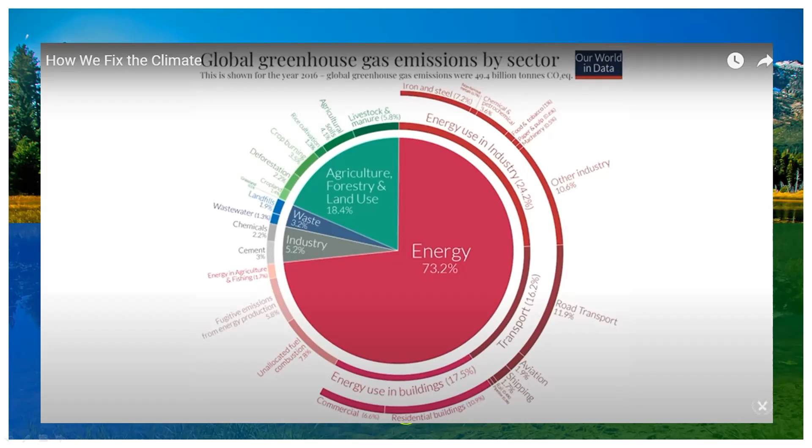Okay, so an example of a sustainable slash natural building material is the proverbial bamboo. So it is found on so many parts of the planet, and it is also found here in our country. However, if I'm not mistaken, the species here are not strong enough to make larger structures compared to other countries like Vietnam, like what the example I will be showing you later will show.

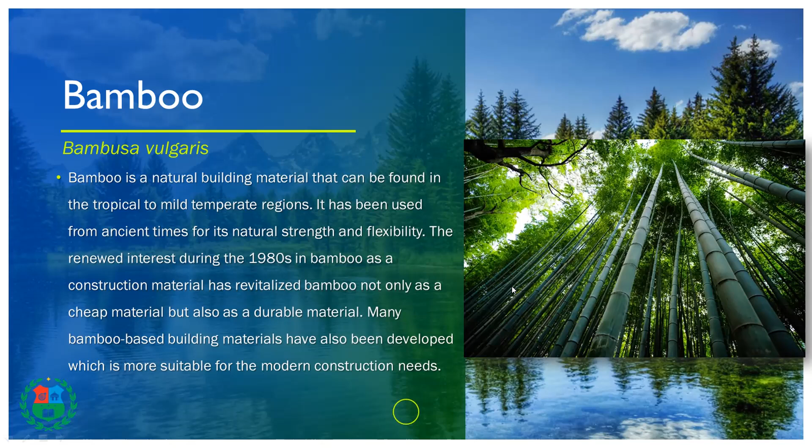So good health and well-being, because I think I would feel very relaxed and healthy if I came into such a structure, because it's very maliwalas. So it is also trying to reach industry, innovation and infrastructure, and sustainable cities and communities, responsible consumption and production, with regards to the consumption and production of natural materials, in this case bamboo and thatch, and of course climate action.

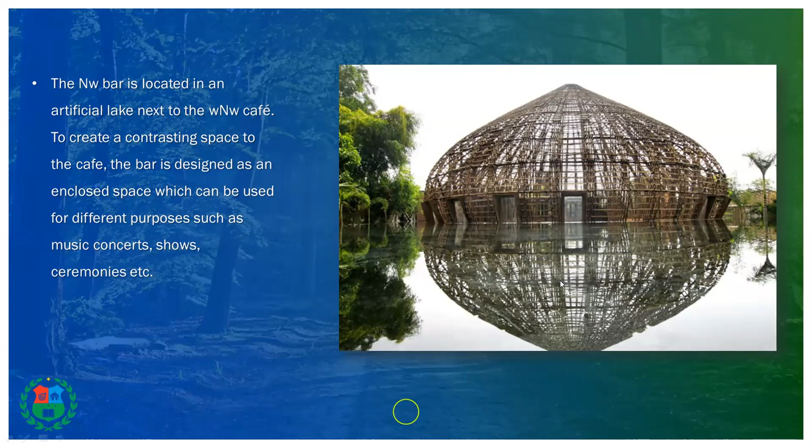So this is the interior of the Wind and Water Bar, a structure located next to an artificial lake. So I said that earlier. And what's great about this structure is it has an oculus at the center, which is reminiscent of structures halfway across the world, like the Byzantine structures, the structures in Renaissance Italy. So they also have these oculi on their buildings. So here in Vietnam, and with this material, it's also repeated, which is a very interesting mix of ideas. And it's not only for aesthetic purposes. This is placed here so that hot air will come up, so that it wouldn't get very hot and humid inside.

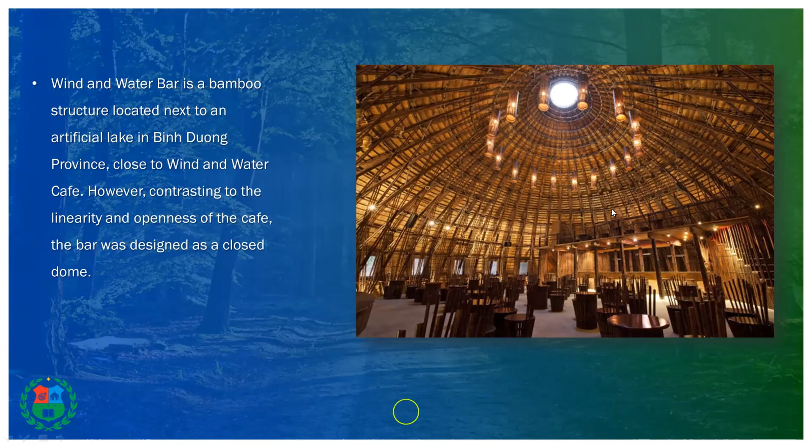Okay, so as shown in this framing, they did not use nails. They tied them with ropes, which I believe are sturdy enough, because the structure is still intact. And then they also placed dowels. So later there will be some details. They also have these stepping stones on the artificial lake before you enter the bar.

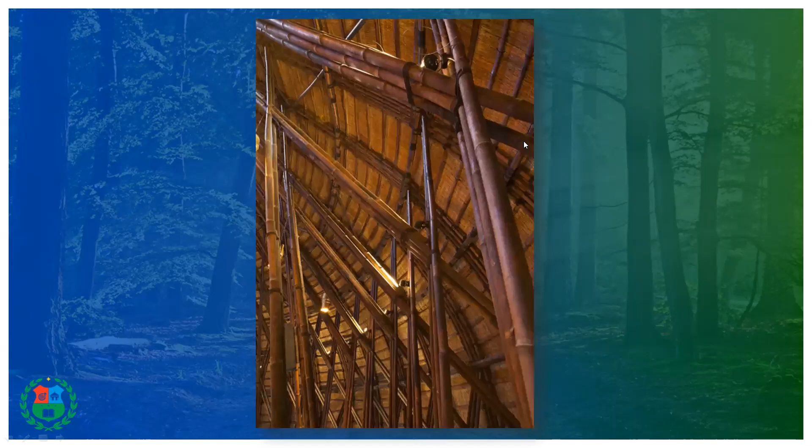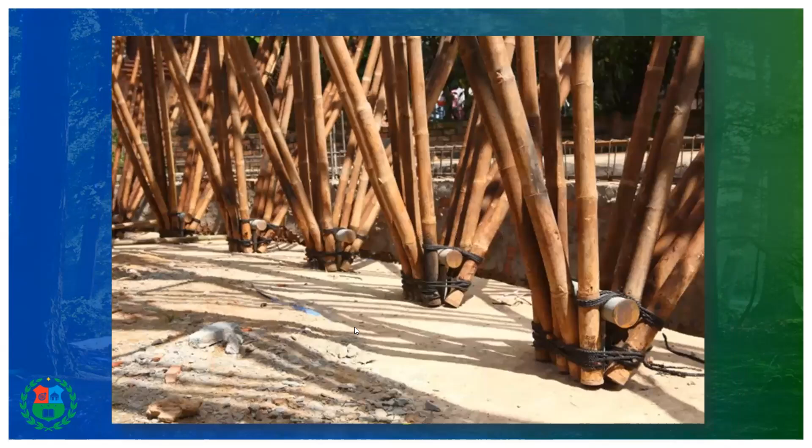Okay, so this is a close-up picture of how they connected the bamboo frames onto the foundations. So this material that I'm pointing with my cursor right now is steel. So they bundled all these bamboo frames, and then they tied it all around with ropes, which is sturdy enough, I would suppose.

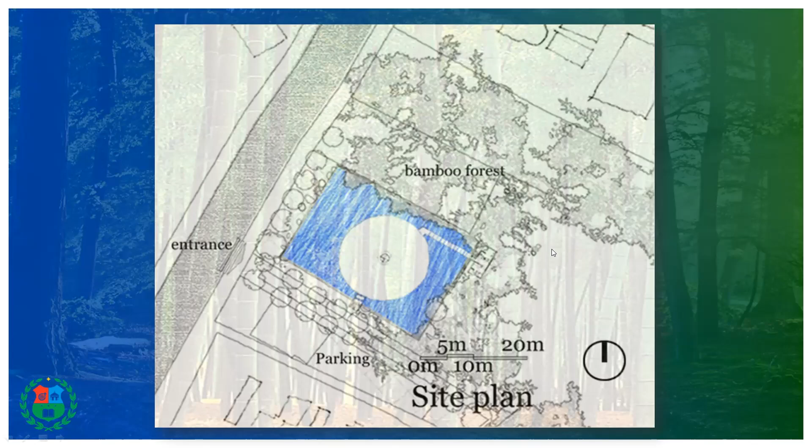Okay, so this is the site plan which I got from ArchDaily, and I apologize if it's just hand drawn. Okay, so this is the artificial lake, and then this is the main road. And then you just walk to the water bar over here, and it even has a bamboo forest on its periphery. And then this is the plan. So it's 15 meters in diameter at the interior, and also they place the comfort rooms away from the main bar over here.

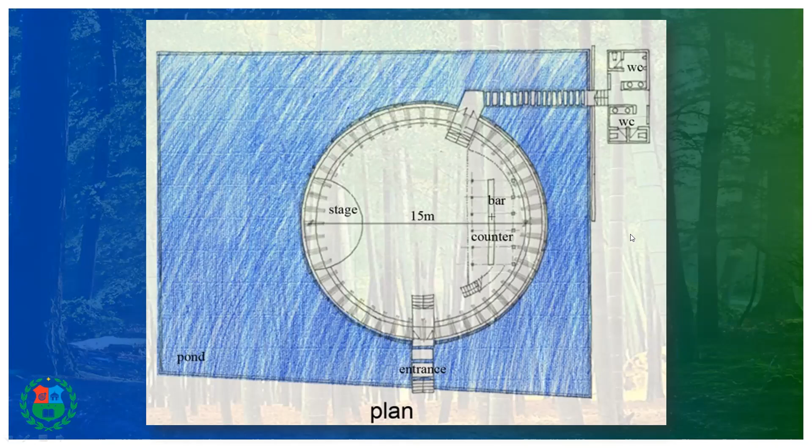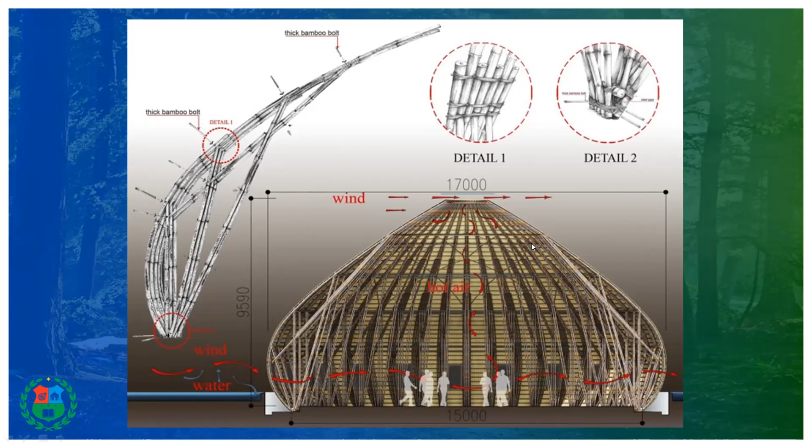So another project that VTN Architects made is the Sen Village Community Center, which is also another bamboo structure. So it also fits these sustainable development goals, number 3, 9, 11, 12, and 13.

So the site area is around 48 hectares, but the gross floor area is around 1,395 square meters, and it was completed in 2015. It has a 250 people capacity and is located around 20 kilometers away from the center of Ho Chi Minh City, and serves as a part of a new residential master plan of 2,200 houses.

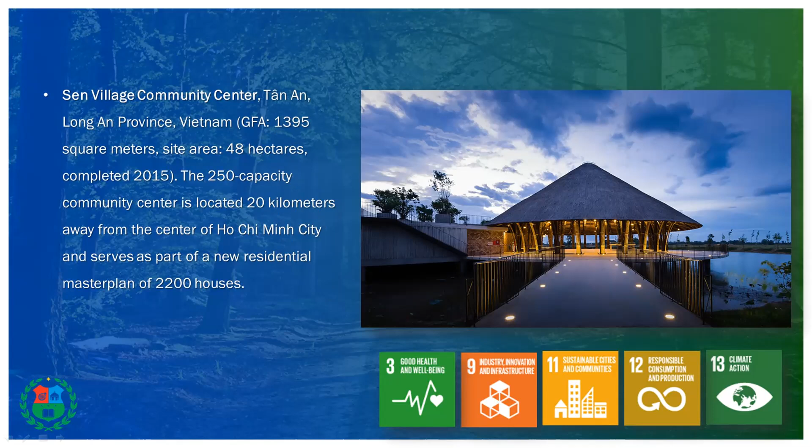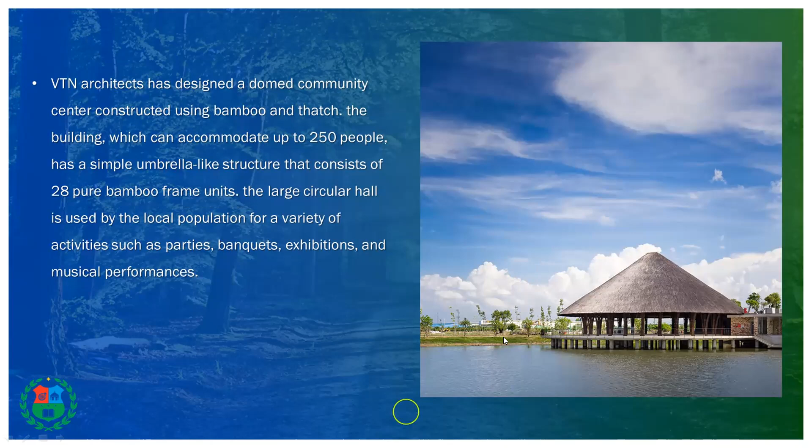So it's very similar to the earlier example because they were designed and made by the same architect. So it's also used for performances. So if we're going to be specific about the species of bamboo, because there are like thousands of species, in an interview by Blueprint Magazine,

VTN said that there are two native bamboo species in Vietnam. So one uses bamboo that can bend to form curves and one that is straight. So this is the one that's straight and this is the one that curves. The bamboo that is bendable is locally called tam vong, or in Latin, this is the word. And then the straight one is called luong, and it has a corresponding species name scientifically.

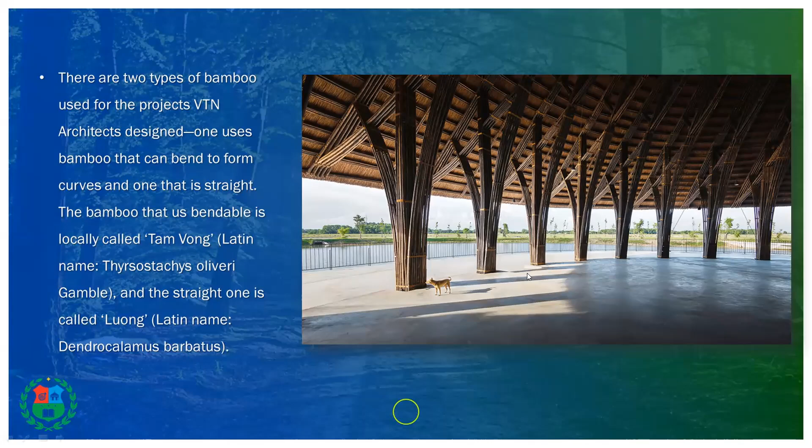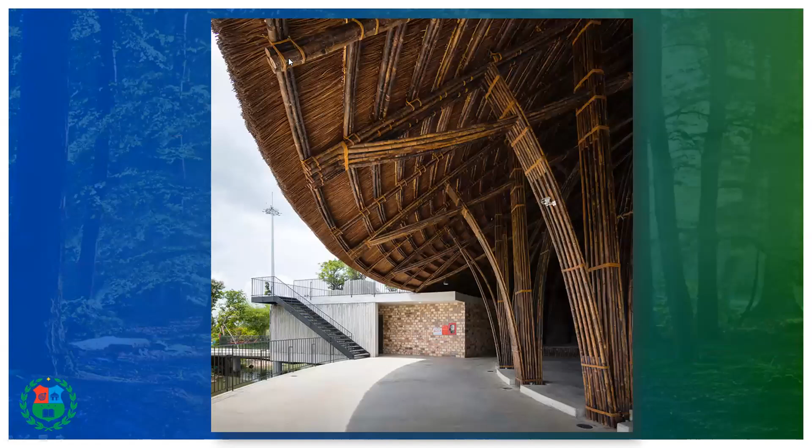So it also has an oculus, so it acts and behaves just like the prior example. So it's nice. And the connections were also tied up by ropes, and I'm supposing they also use those thick bamboo dowels for the connections over here to make it more sturdy. So this is another view of it, I think this is at dusk. And this is another exterior view of it at night.

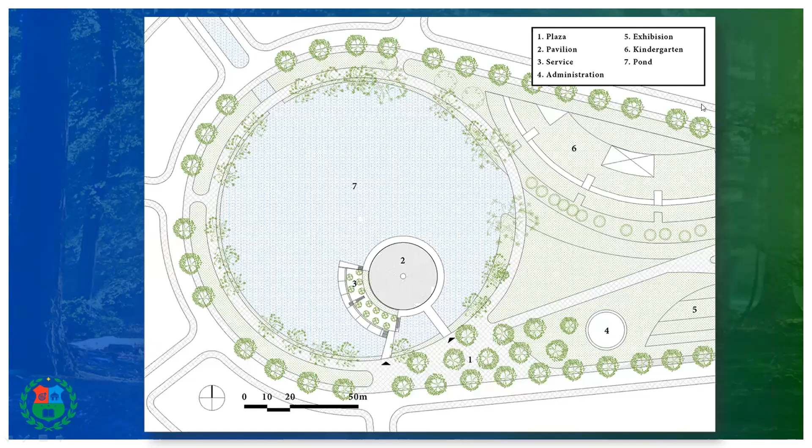So what I know with these foundations that are supposed to be embedded in water, I just know this from reading, is that these foundations should be pierced very deep within the earth, where the bedrock lies, so that the foundation is going to be stronger. So it shouldn't be just around here. But I'm betting that these foundations are somewhat deeper to make the structure sturdier.

So it's not made entirely of bamboo because the slab over here is made up of concrete. So it's not 100% considered as sustainable and natural. But I think that's good enough and negligible because it's almost impossible to achieve 100% sustainability and naturalness of the material.

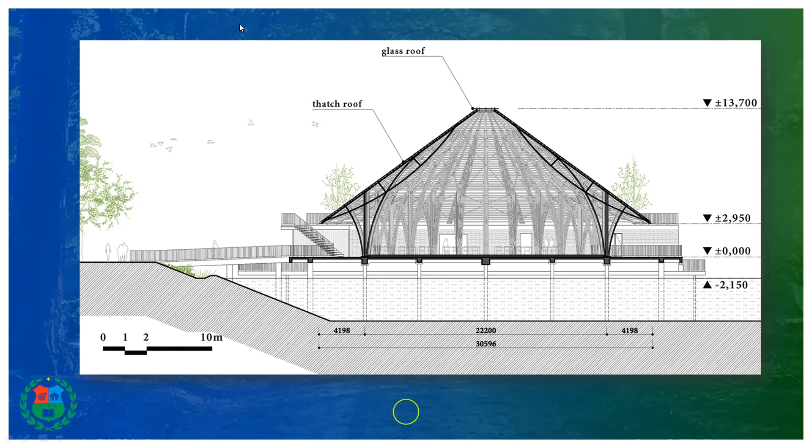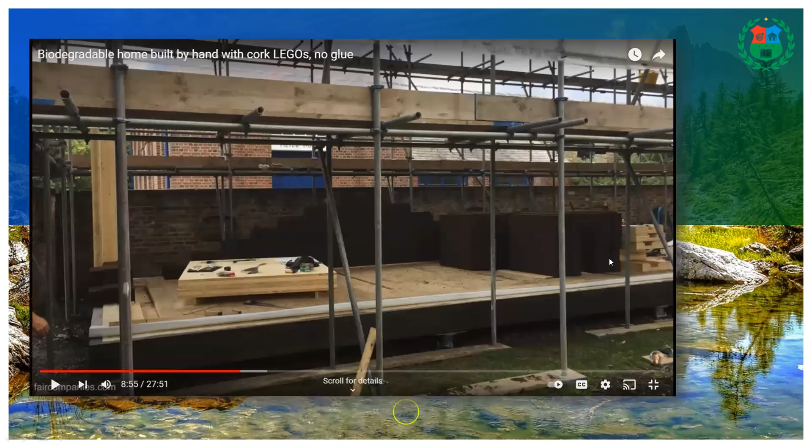Okay, so this is a screen capture from YouTube, from the video Biodegradable Home Built by Hand with Cork. It's just like Legos. They didn't use any glue, so that it would be a lot easier to dismantle them once the building has used up its useful life. These are pictures while the architects were constructing the cork house. They also used the scaffoldings that we also use here in the Philippines.

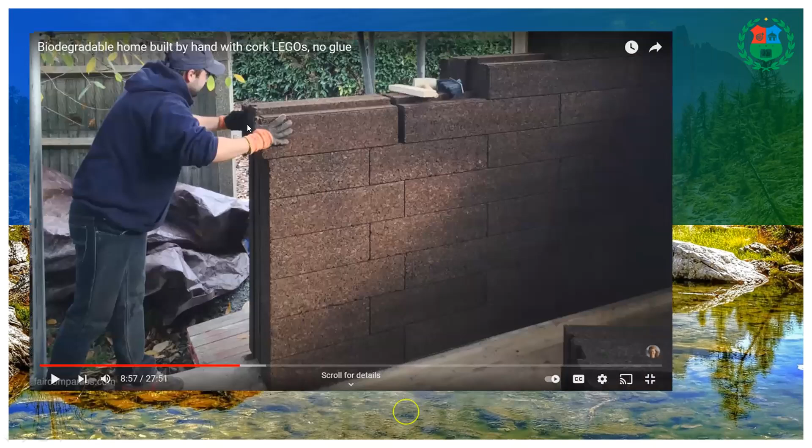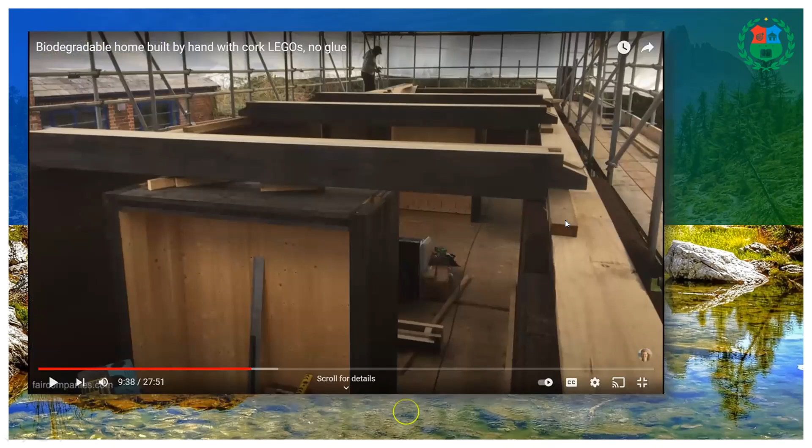If I'm going to extrapolate the dimensions from this picture, I know that this is 50 centimeters, so that's around half a meter, and I would suppose that this is around 50 centimeters because it's square, so that we can imagine them. As shown in this picture, it's not entirely made of cork, because the beams are made of timber, so that they can be sturdy enough to carry the compressive load from the pyramid and transfer it onto the cork walls, because timber is a little less porous than cork and more sturdy.

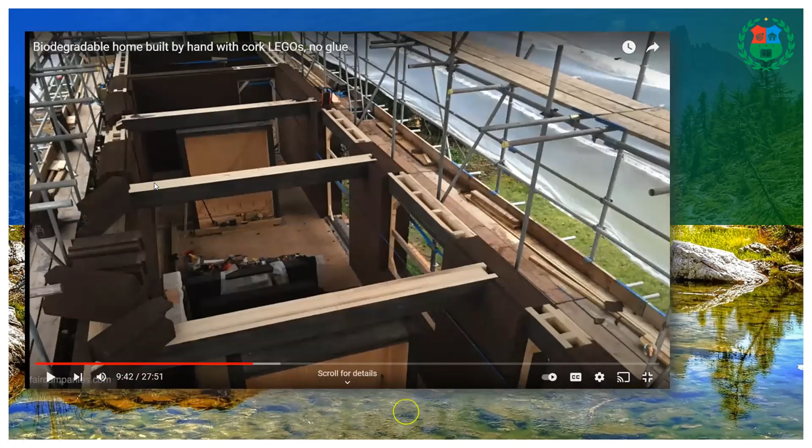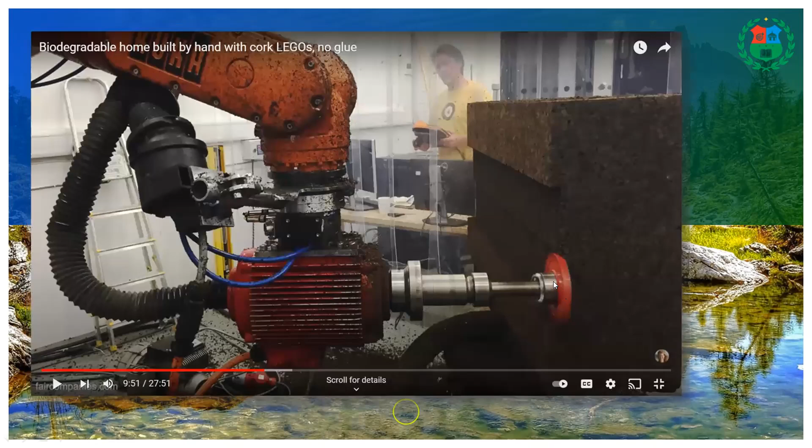So these are more pictures while the construction was going on. They numbered the cork blocks so that they wouldn't be confused as to where to place the specific cork blocks, because for the corbelled pyramid, they don't have the same dimensions as the walls, so they needed to number them so that they wouldn't make any mistakes. This is how they made the grooves on the expanded cork. They used a robotic circular saw to make the grooves. So it's very high-end technology.

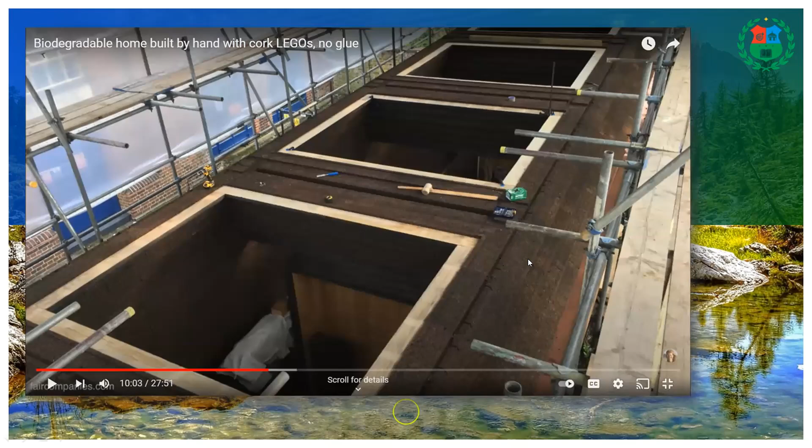So they're starting the construction of the corbelled pyramid over here now. This is how it looks. And then they were going to place an operable window here. As we can see, there's a lock, so it means that it's operable. Also these pipes are fire sprinklers, made of copper, which is also antimicrobial. From the research that we did, I think last sem, copper is the material that bacteria or COVID-19 viruses can least adhere to. So this is another advantage. This is the top view of the Cork House in England.

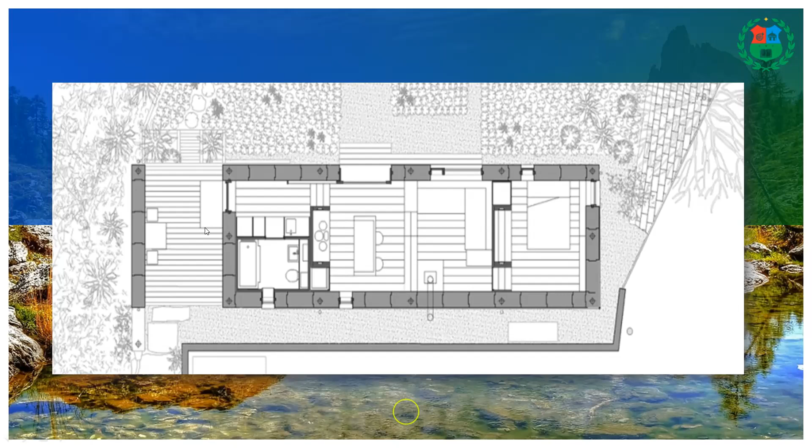And then this is the fireplace, and then the living room, and this is the bedroom, and here is the kitchen and the bathroom, and there's a small patio at the left side. So this is its elevation as well, and this is its section.

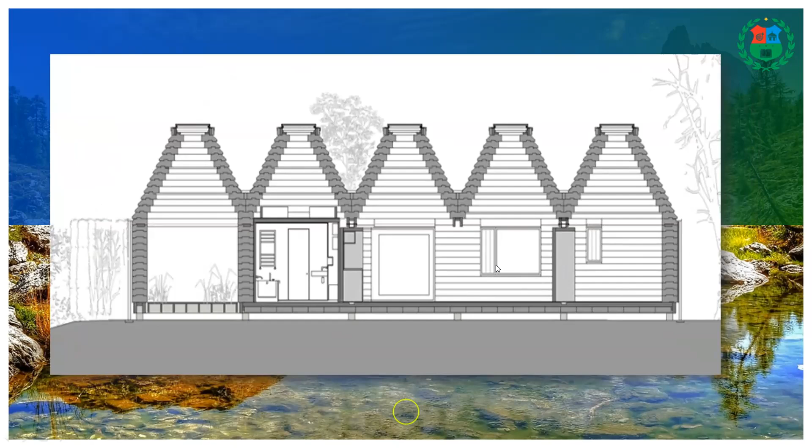So as we can see, the groups on the corbel pyramid are different from the walls, so they needed to be numbered. And this is an exploded axonometric view of the Cork House. So it has these very thin foundations, which I think is just okay in England, because I think they don't have many earthquakes to worry about.

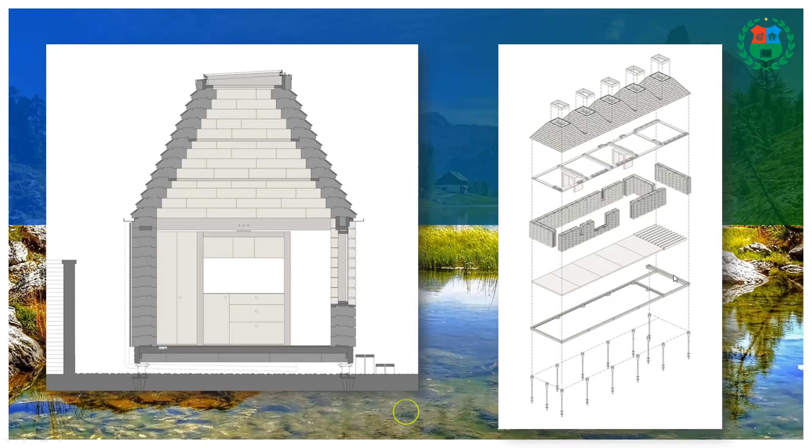But if this was made over here in the Philippines, this would collapse once strong earthquakes happen. So if this would be incorporated here, the design of the foundations would be completely different from how it is in England. So this is like a 3D dismantled view of the Cork House, which is around 75 square meters.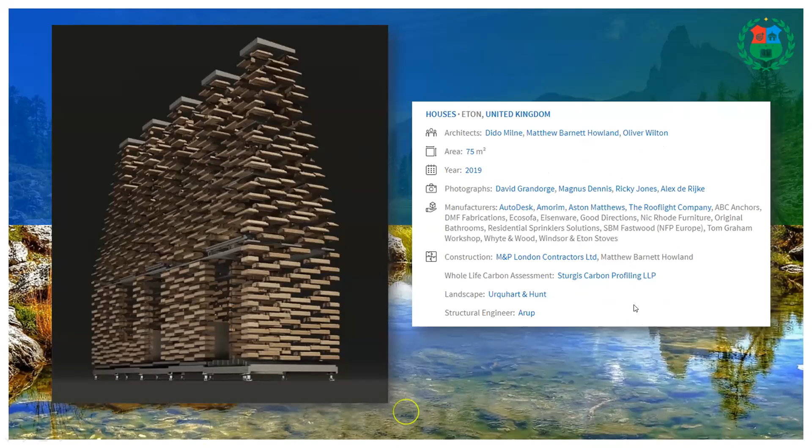Okay, so to bring us closer to home, and so that we can relate, there are numerous researches about coconut husks as an innovative building material, because husks are just thrown away once farmers have gotten what's inside. So there was this Swiss scientist that proposed that it would be used as a building board, for walls and ceilings, para hindi sayang yung material kasi binaburn lang.

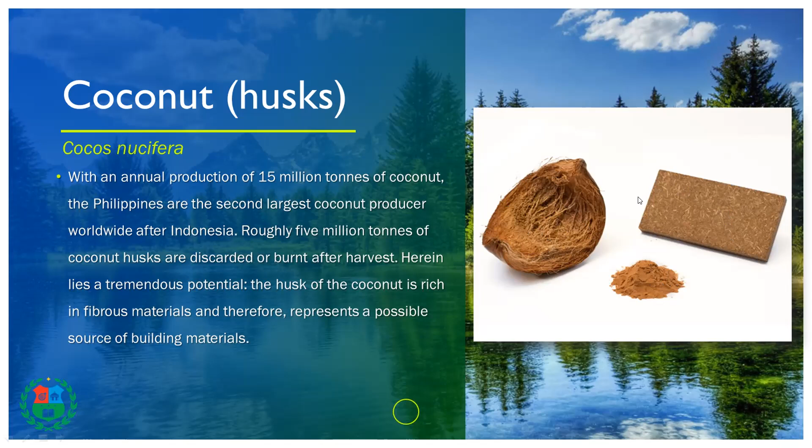I just forgot to place it here, but I think it deserves a spot over here because it provides homes for the less fortunate Filipinos. So the research team of the Swiss scientists' primary objective was the development of an environmentally friendly technology for the production of an affordable and natural building material. So in this case, this is a fiber board consisting of crop residue from coconut production with a tannin-based adhesive.

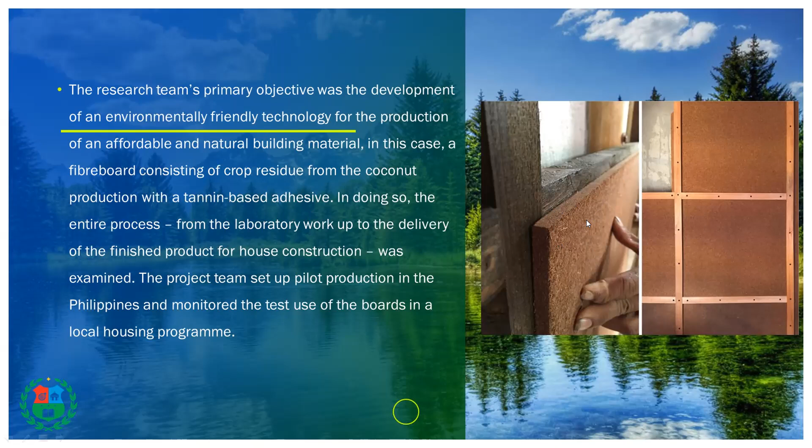So the project results indicate that the coco boards offer considerable potential for the local economy. So hence this will also alleviate poverty, for the panels are fairly easy to manufacture and install, and the raw material is available in sufficient quantity. Because we are only second to Indonesia with the largest supply of coconut trees, because they are very commonplace all over the Philippines, no matter where you are.

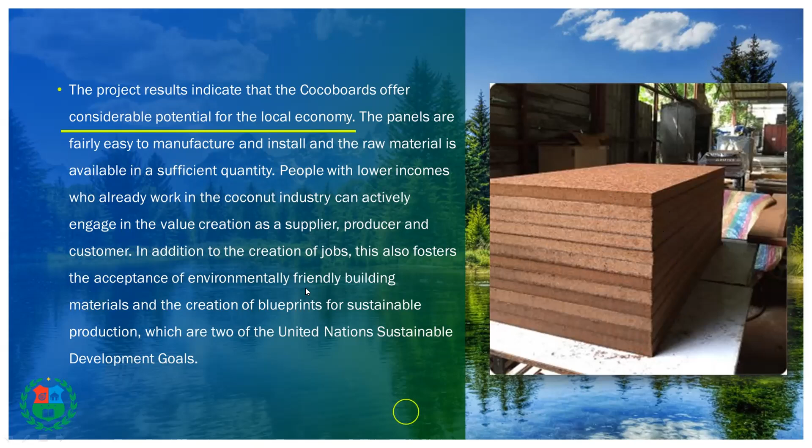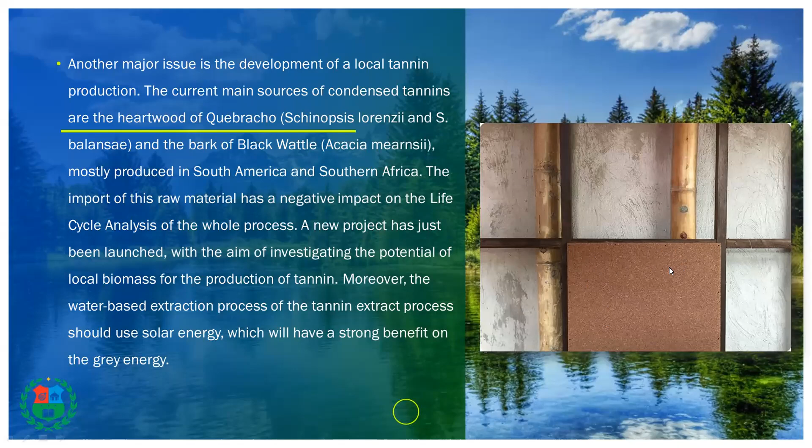Okay, so what this paragraph is trying to say is they're trying to find another tannin adhesive material that would be more sustainable, because the current one is produced in South America and Southern Africa, which isn't sustainable in the first place because it's toxic. And when you import it from another country, you would use transportation, and if you use transportation, you're going to use energy. So hence it's unsustainable in a way. But this is good enough because we cannot get 100% sustainable. But this is a good step in the right direction. So here are my references.